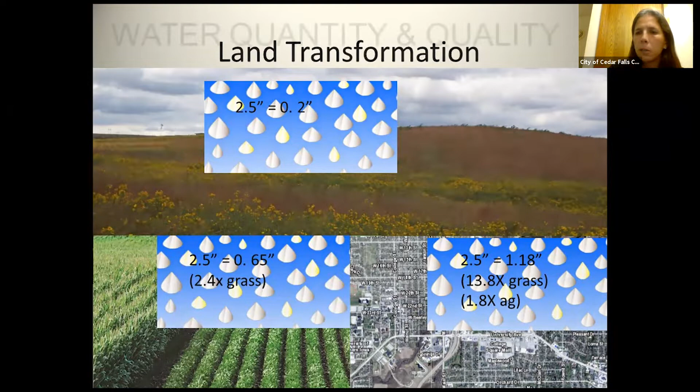So sometimes people think, well, what's the deal? I'm just going from crops that are already bad to urban. But it is a big difference when we go from agriculture to urban. So what's the issue with more water or more runoff?

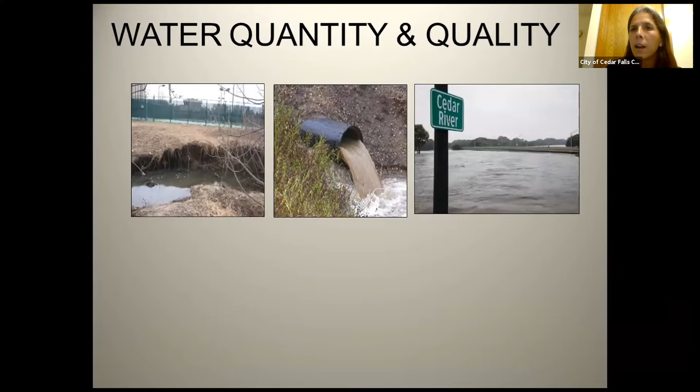Well, one thing is it causes erosion in our streams. Our streams have not evolved to handle this fast runoff, and with that it brings a lot of sediment that has consequences, for instance, for nesting sites of fish and fish populations. Of course, more water, more runoff, less infiltration generates flooding.

Again, erosion issues, but not only problems for the streams, but for our infrastructure. We have to update it, and you'll see in my presentation how much money we spend updating this infrastructure.

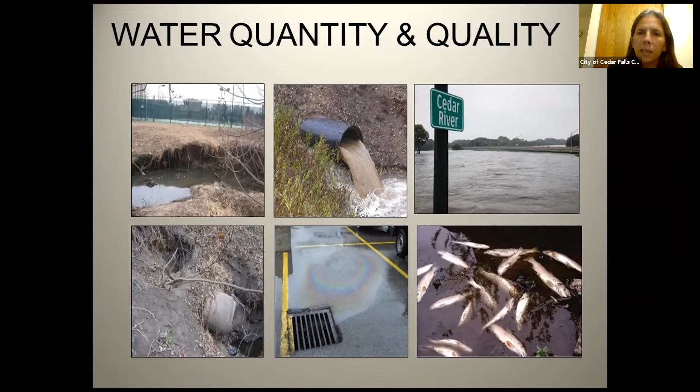And anything that gets into the parking lots, onto the floor, on rooftops, in any place, gets into the water, making it a water quality issue that can result in things like fish kills. So water quality and water quantity are both affected by this change in runoff.

Because of issues like this, the Cedar Falls Stormwater Program was created. I highlighted this from the website — I apologize for all the text — but I want you to know all of this is an ordinance. You can find it on the website, but I wanted to highlight what we do, and why are we here.

What's our goal? The main thing the Cedar Falls Stormwater Program needs to do is address the mandates that the federal government gives us through the Clean Water Act. So we're required to have this program.

And with the program, we try to do a few things. One, manage and reduce the potential for runoff pollution. We want to control pollution, and I briefly explained some of the issues. But we also want to concentrate on promoting health, safety, and general welfare of people and property.

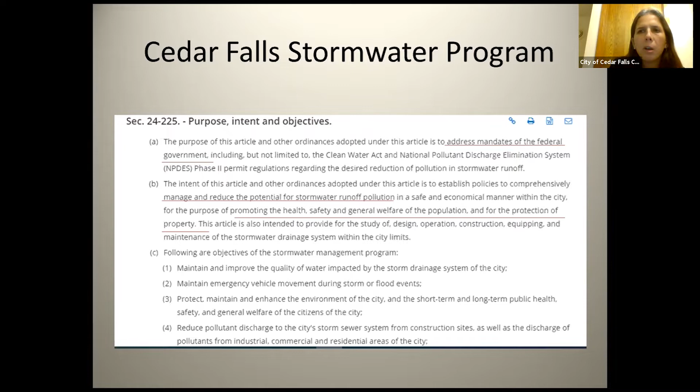This is also related to flooding, for instance. So those are some of the goals — there are many goals — and if you're interested, I'd advise you to go to the Stormwater Management Program on the website and see what the city is supposed to be doing with this, and why we're spending money on what we do. Those are the reasons why.

So I am the stormwater specialist for the program. I deal mostly with the construction and education parts of the program, but there's much more that goes into it. The person who deals more with the management of the program and design decisions of what we're going to do is the city engineer, David Wicke.

So if you have questions about things that I don't have control over, David is the person to contact. And then Chase Schrage is the Director of Public Works, who oversees David.

So this is about who deals with the stormwater program and who makes the decisions on where the money goes. I often get the question, what happens to my $3.50 that I pay every month for stormwater? Right now a household pays $3.48. In July it's going to go to $3.65, and that's as high as it's going to get unless we pass a different ordinance.

So what happens to this? We get it together, and this year it's budgeted that we're going to get about $950,000 with that. But we also have other ways to get income for the stormwater fund, like permits. When people are going to build, they need to get a permit and pay for that, which generates about $25,000, or about 2.5% of the budget, plus interest that we get. But most of what we do comes from the money that we all pay.

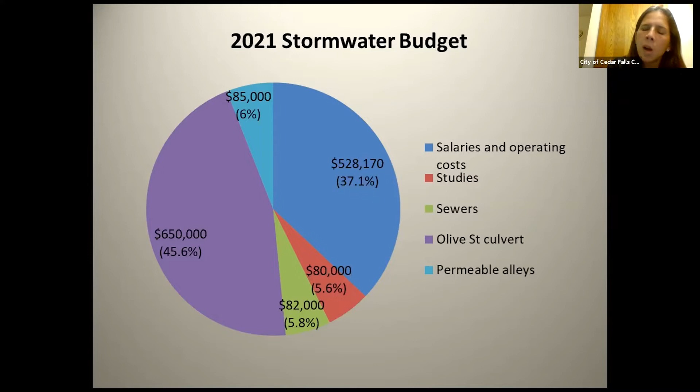So I want you to see that's what we have budgeted, but what gets in the budget is not what gets done. So I ask, what have we spent in the last years? But before I go there, this is the biggest expense that we have, the Olive Street culvert. There was public participation open for this, it's already closed, but since it's the biggest project, I wanted to share it with you.

On College Street we have this plaza called Pettersen Plaza, and here is the Dry Run Creek. Can you see my cursor when I move it? Perfect. So the Dry Run Creek is here, and what happens is there's a lot of erosion in this small area. So the project proposes to extend this plaza, pave over it, and put the stream into a cover, a big pipe, and expand this area.

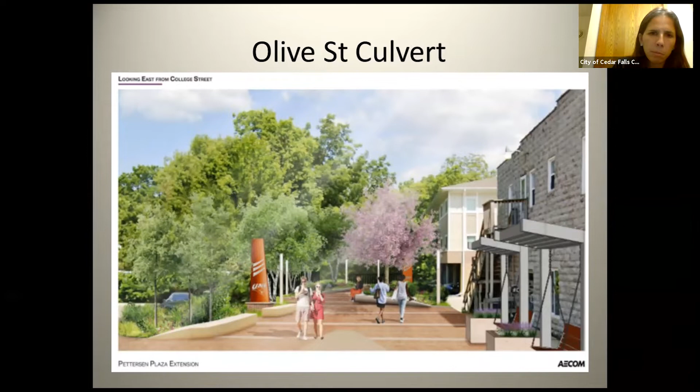So it would look more like, I don't know, just an area for people to walk over the creek. That's the bigger project that we have, so I wanted to show you that. But again, that's what is budgeted — we don't know if it's going to happen or not.

So I asked what we have spent in the last couple of years. In fiscal years '20 and '21, this is actually what has been spent. The most money, the biggest project, was for the Walnut Street box culvert. Culvert replacement — when there's a lot of water, we need bigger infrastructure, and it creates erosion and issues, so that's where our money has to go to replace this, and it's expensive. Hopefully we can find ways to reduce that would cost us less.

The other big expense was for the Clay Street drainage. They had to replace a lot of the pipes because they were really old. They also added two good biofiltration areas, a huge one and a small one, in a permeable alley, so that's another big part. The other big part that we already spent on was permeable alleys — the city is doing about three a year. So those are the bigger expenses.

So, for instance, in the Walnut Street box culvert, this is the picture from one year ago, before the project.

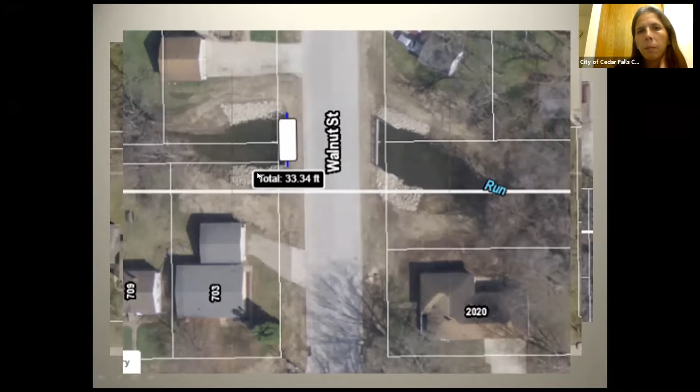I was trying to see what was the change. What you can see here, the measurement of the width is about 24.5 feet, and when it changes, it's about 33.3 feet. So they make them much bigger, and you can see all this erosion control in the banks. And that's an expensive project because of this. So that's what has happened.

This is the second project that we spent about $300,000 on. Part of the money came from a state grant, but also part came from the fund. So here's the permeable alley that was placed there, similar to permeable alleys you might have seen in other places. And here is the bioretention area, which is like a huge rain garden. Josh will talk about rain gardens, and this would be just like a big rain garden. So that's what the city has done.

But what can you do? What can regular citizens do? This sounds fun, seems fun to go to an outdoors festival. Someday we will do it again. But this doesn't seem so fun, just sandbagging, and you maybe remember that. And that's why we think, oh, we go and help when we need to, but what about helping before that, hopefully?

I think really the main thing anyone can do to help is contact elected officials. Any big project will take input from citizens, so try to be aware of these things. It's hard sometimes, but that's important. Just contact any of the elected officials and say, hey, I'd like to see more of these, or can you explain to me why this happens? I think that's really where the city takes direction from all of us.

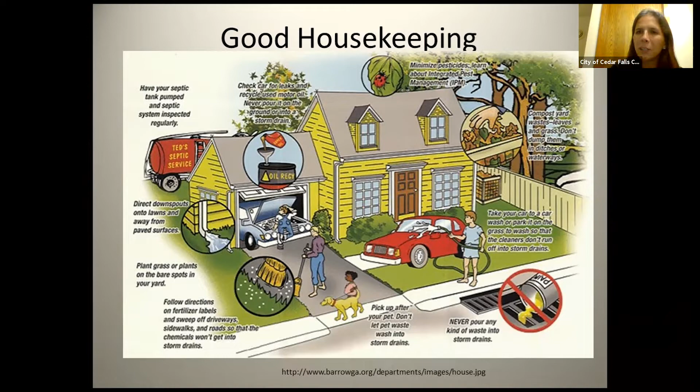So those are things you can do with water quality. One that helps me a lot is call me. If you see anybody putting anything in the creek or in the sewer, it goes to the creek — that's called an illicit discharge. Only rainwater can go to the street. Even sometimes you might see a pipe with clean water that might come from a pool, but you cannot put any pool water because of the chlorine level.

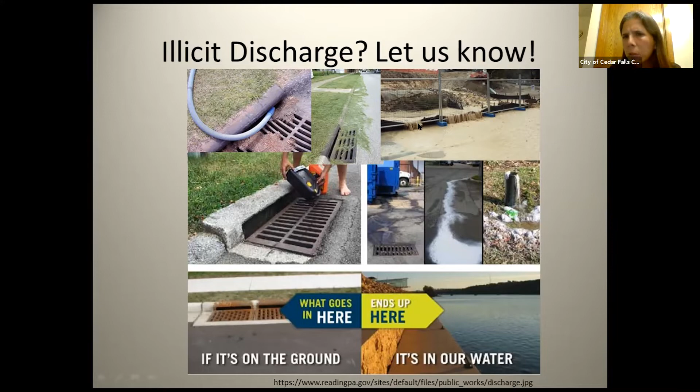So just let us know. Or construction sites that don't have good controls, just call us. You're the eyes for everybody, so let us know. Now if you're more worried about water quantity, a lot of citizens call me because their yard is flooded often.

So what can you do? We're gonna talk about that in a minute. Not only is the local area important in your home, but remember that causes erosion and flood downstream. The issue is that everything is connected — that's why we're getting so much water at once, because all these rooftops and streets and everything goes fast to the stream. So what we need to do is disconnect this. How can we disconnect all these impermeable surfaces and send water slower to the river?

One way is with rain barrels. There are many ways, but one is with rain barrels, and I'll talk about it. The other would be with rain gardens, and Josh will talk about it. So installing rain barrels is an easy way to help.

I have to say, I don't have one — I have one that I haven't installed after preparing for this presentation. I want you all to come by my house and see my rain barrel working in May. Pretty easy — you can make like a stand. You just need to make it tall enough to fit a bucket underneath. So that's what you want to make sure happens.

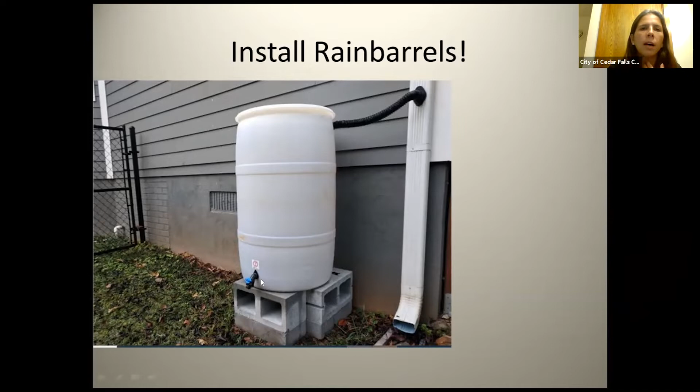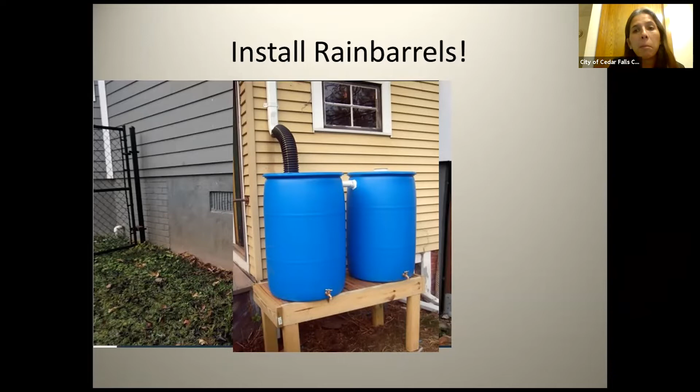You can install one or two. A lot of people just put them together and install two, because you'll see that one rain barrel fills really quickly. But some people go all crazy and install many, and in areas of the country where it's dry, you can really benefit from this economically. So it depends. Cedar Rapids has these cisterns in the library that are huge, so the size depends on what you can do.

You can be part of this by talking to elected officials. Just give them ideas, let's do things like this. It's cool, and it helps all of us.

So what are some benefits or considerations to have? The main thing is free water. I wish I could tell you that you'd save a lot of money because water is expensive, but we know water is cheap. However, you're saving some in free water. Now, I look for plant growth, and it does seem that the pH is better for plant growth, and also some of the elements are better for plant growth, so that's beneficial.

But there's also some concerns about what could be in your roof for plant growth, so I looked it up: should you do a water test? The answer I have for you is not to worry. When different people have done water tests, they've found there's really no worries, no need to do it, no concerns.

The main advantage of a rain barrel is that it's the cheapest and easiest option to help reduce runoff. Even if you don't have a rain garden or anything to put the water into, just waiting until after the rainfall has passed and releasing the water little by little can help a lot.

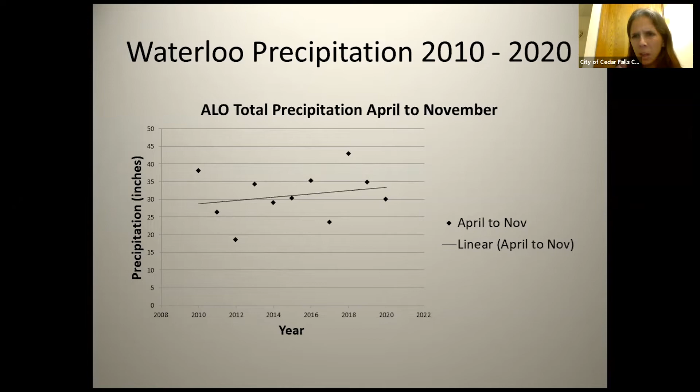I looked at the Waterloo precipitation for 10 years and tried to see how much it rains from April to November, which is when there's water, not ice or snow, or at least that's what I took. It varies depending on the year, but 50% of the time, the median value is 30 inches a year between April and November.

It also varies depending on the month. This is for 10 years that I looked up, and I looked at the median for each month. You can see that the wettest month is June, but most of the months are around 3 inches or below per month.

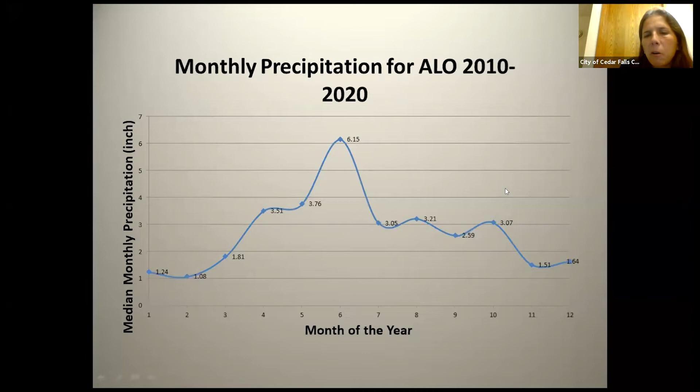So I said, okay, let's look at June and July, and I looked at 5 or 6 years for this, trying to see how many times, if I want 50% of the rainfalls for June, I'd need to collect at least 0.5 inches. For July, which is more typical, it's 0.46. So I said let's go with July. If you get your roof area and multiply that by the rainfall, and do a little conversion, you get how much you're going to collect.

So let me explain this really quick. And if you have paper and pen, I'll tell you in a minute what to do. So I said, okay, a typical home, let's say it's a 1,000 square feet roof. And you have 4 different downspouts. So let's divide that in 4, it's 250 square feet. I got like 50% rainfall of 0.46 inches, and I did the conversion.

To get 50% of the rainfalls in a roof of 250 square feet, you need 72 gallons. So rain barrels are usually 50 to 55 gallons, so you would need 1 or 2 depending on that. So you don't have to remember all of that. The only thing you're gonna do is think of the rainfall that you wanna capture. Again, it could be any of these.

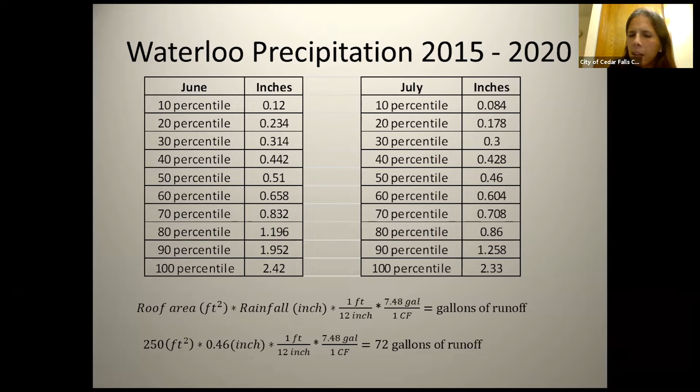If you wanna capture most of them, 90%, do it at 1.2. Or if you want to just capture, I don't know, 30% to 0.3, it's up to you, but this is just a guide, and I'll put this for you. I'll have this available for you to see.

Now, where do you get them and what are the prices? Any place. The truth is few stores carry them in the stores. So most of the stores you have to order them and they send them to you, and most of the shipping was free. So I looked at Walmart and prices went from $80 to $170 or more. There's some really crazy rain barrels.

Home Depot, same thing, 87 to 120 in those ones. Menards, same thing, 80 some, 100 some. Menards and Home Depot also carry these rain barrel converter kits that are only $30.

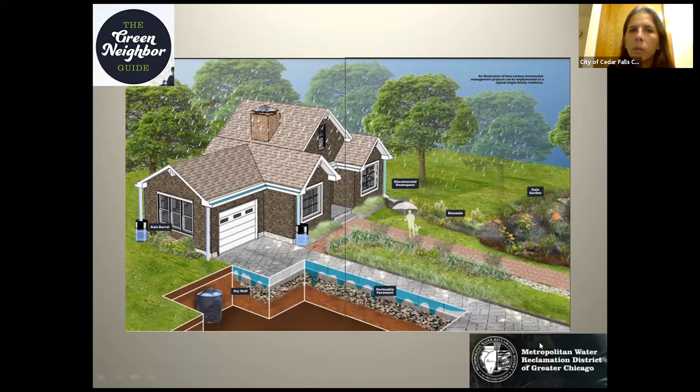Now, one resource that I really liked when I was looking at things was this Green Neighbor Guide by the Metropolitan Water Reclamation District of Greater Chicago. So I recommend that resource, and they have a whole book on all these things, and it was pretty well explained. And one of the things that they include is rain garden. So that's where Josh is gonna go in a minute.

But before that, I just wanna give you a minute. If you have any questions, you can type them in the chat and then we can go there. While you think about the questions, I'm gonna put my screen on this, so you maybe have time to write it down if you need to. So Felix, you tell me if we see any questions. So far we have some shy people, so let's see. Don't worry, if you want, we can also do questions at the end when Josh goes.

Josh, okay, so that's perfect. Some rain barrels at Menards in Cedar Falls and Waterloo. Do you have a rain barrel that you recommend? I really don't. Josh, do you have any that you recommend more than other brands?

I would say there's so many different styles out there, so get one that you like. I mean, if it's going to be off your back garage or back shed where no one's going to see it, you probably don't need a fancy one. But if you're putting one in your front yard right by your door, you might pay a little extra to get a fancier one. So it's really personal choice.

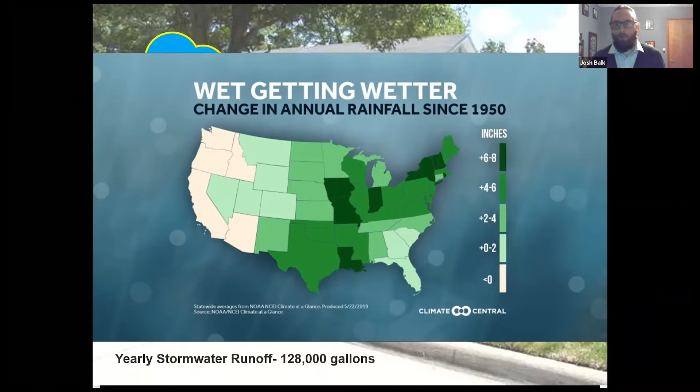So altogether, just a 1 inch rainstorm on an average home can shed off about 4,000 gallons to our storm drain system. So if you think in the Cedar Valley area, that's close to 130,000 gallons of water just from your home. When you think about all the homes in our community, that really adds up to a lot of water. And then the other thing is we're seeing climate drift and changing weather patterns here in the area. We've had wetter years recently, and in Iowa specifically, we've seen an increase in the average amount of rainfall anywhere from 6 to 8 inches. And there's projections that could increase. So the amount of water we're receiving in our area is being affected by that.

And that's when I get calls from homeowners who did not buy waterfront property, but are dealing with that in their backyard. There's a lot of water and not a lot of places to go. So that's when we come up with these wonderful solutions with things like rain gardens. And like I said, this is trying to harken back to the native Iowa hydrology and how water used to have a chance to get into the ground, to infiltrate, to slow the system down. So a lot of what Maria was talking about is really what our goal is with rain gardens here.

And so rain gardens themselves, it's nothing complicated. It's really just trying to design a beneficial landscape feature. These are strategically placed in the yards. It's not just the bottom spot in your yard where all the water goes to. There's some considerations we'll go into more detail on, but really we're just trying to capture an amount of that stormwater coming off from the roof or the driveway or the sidewalk or the road, direct it to these rain gardens, give it a chance to temporarily pond there, usually less than 24 hours. So that way that water can work its way into the ground.

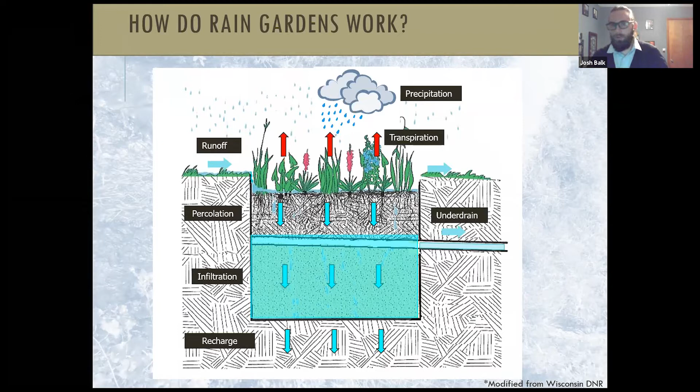And sometimes we have enhanced rain gardens designed. So we might include under drains or overflow options for those really heavy rainfall events. But then we have our wonderful native prairie plants in there that also help absorb the water, take it up, transpire it. So this is a much more functional system, like I said, akin to our native prairie Iowa heritage.

Well, just last week, it was formally announced that we have the updated guide that just came out. So you can go ahead and download it for free. I think for a short period, it's available to download also free through Amazon Kindle. So you can get all the information you need if you go to iowastormwater.org and go to the rainscaping and the rain garden, and you'll have the link to that. But like I said, it includes all the details I'm going to discuss this evening and goes into more details.

So some of the considerations with rain gardens, just like retail, property and all that stuff, it's all about the location. We want to have these rain gardens included in an area that's going to try and help the water quality. We don't want it, like I said, at the bottom of your yard. We don't want it in the wettest spot of your yard. We need to avoid utilities and trees and all that stuff. We also want to make sure it's not going to cause issues draining back to your house when it overflows. So there are some considerations with the location.

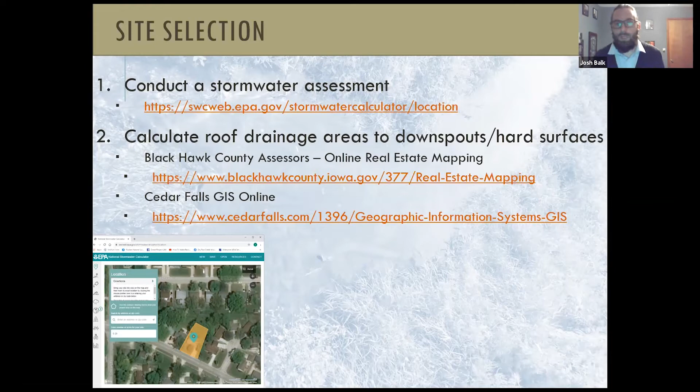So that's a really cool feature. If you just do a search for EPA stormwater home assessment, or follow that link there, that'll get you all set up.

Another thing to consider is that we're trying to treat runoff from these hard surfaces, so calculating that is not always easy. If you want to be out there with a yardstick or a tape measure, you can go right ahead.

Otherwise, there are some useful resources online here in the Cedar Valley. If you're a Cedar Falls resident, you can go to Cedar Falls GIS Online. This is a free service they provide where you can zoom into your home property and designate how much hard surface you have there. They have useful measurement tools that do a really great job with those rough calculations.

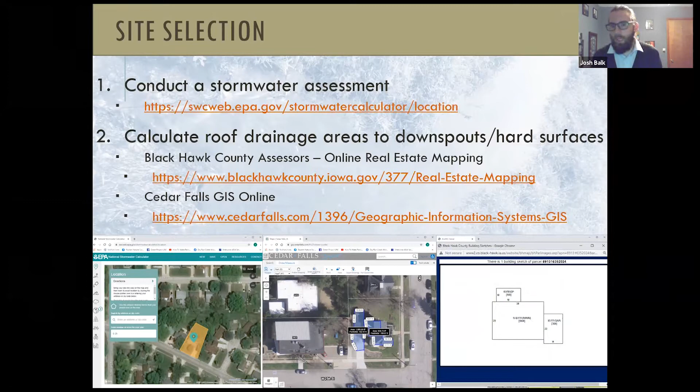If you don't live in Cedar Falls but you're within Black Hawk County, you can use the Black Hawk County Assessor's website. Type in your personal address and it'll come up with a detailed plan for your home, designating the approximate measurements. That'll help you figure out the amount of roof area draining to each downspout.

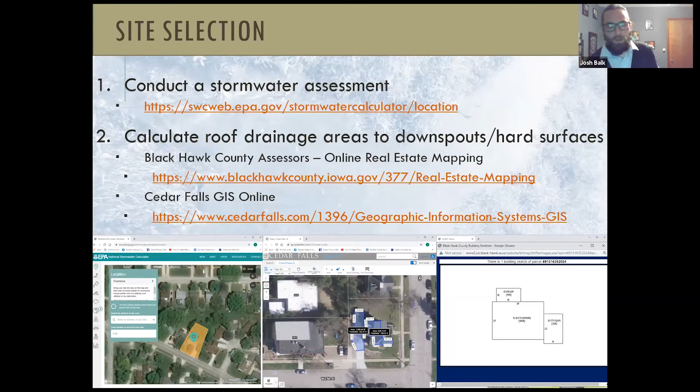Another good idea to help figure out how much area you have draining: go out during a rainstorm event, bust out your umbrella, and see how the water flows on your property. Do you have a hill or slope where it's coming from your neighbor's house? Is your water running off down to your neighbor's? Just see where this water is going.

Especially if you have a nice sketch pad with those grid squares, that can really help you designate out all the trees, the buildings, and all that stuff, and help you get a better idea of where might be a good place to put in a rain garden.

Another important thing is to have your utilities marked, so that way you aren't digging near your internet line or anything like that. You don't want to lose power for an evening either - that's no fun.

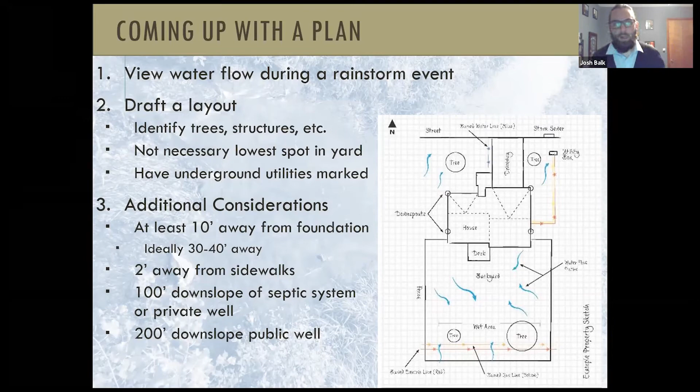Because we're encouraging water to get into the ground, you don't want it right next to your house. Have it at least 10 feet away from your foundation, but ideally 30 or 40 feet away from buildings. You also want it away from your sidewalk, from septic systems, and from private wells. Those are just some considerations on siting your rain garden.

The next step is to figure out your soils. There are some useful tools online - you don't even have to bust out a shovel. You can just use your mouse and do some research.

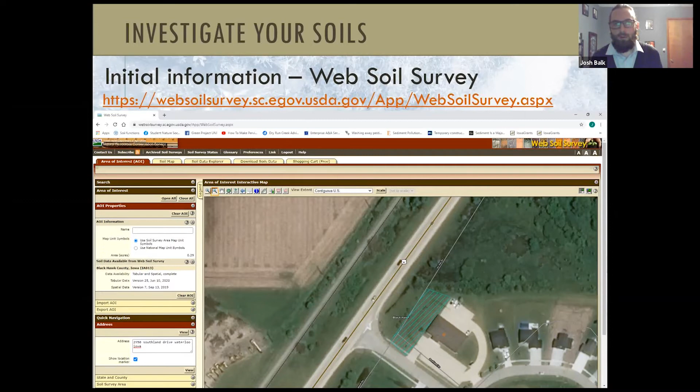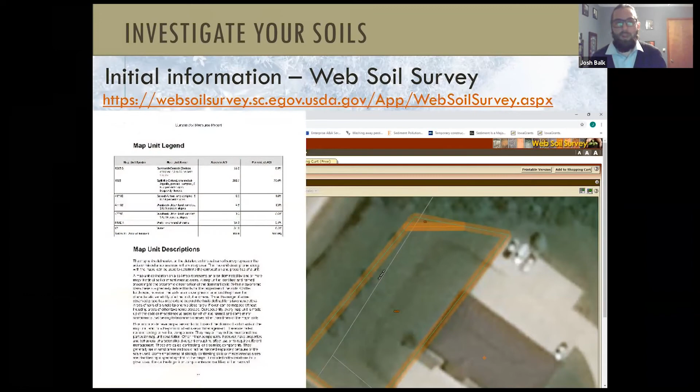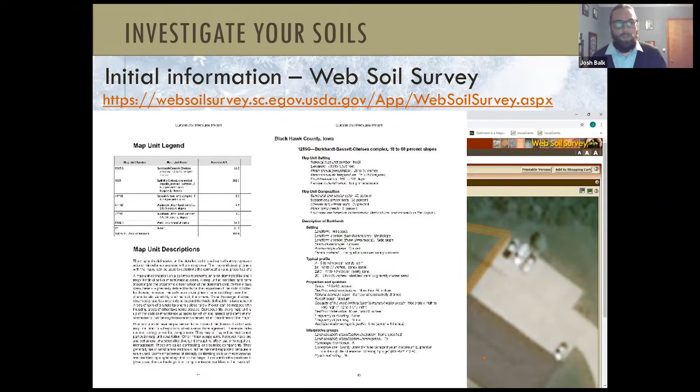If you do a Google search for Web Soil Survey, you'll get linked to this service provided by the U.S. Department of Agriculture. Type in the address of your home, designate your property area, and it'll tell you the soil types designated for your area. You can then run a soils report, and it'll give you detailed information about each soil type within your property - its drainage, depth, and the estimated depth to groundwater. Very useful information, and it's a free service - just follow your mouse and let it do all the work.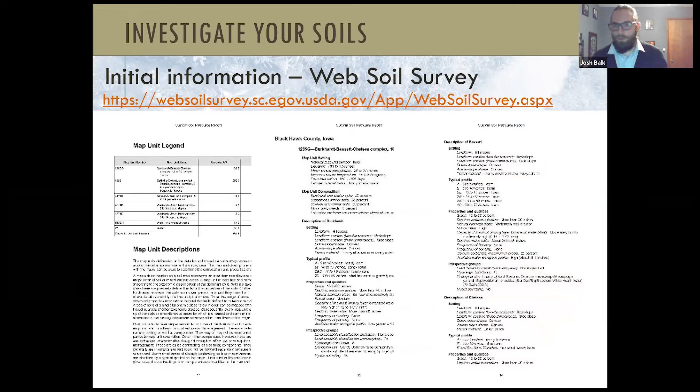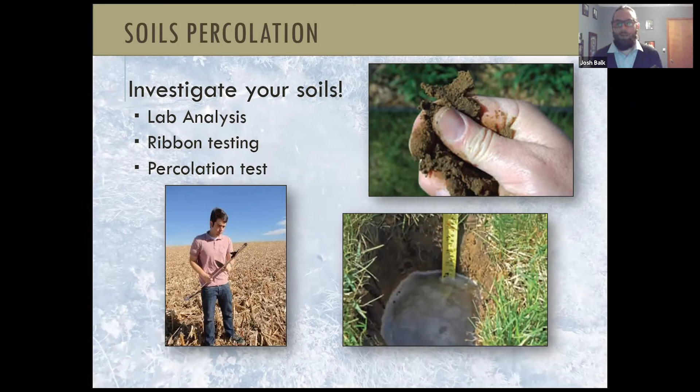But you can't just rely on those online tools. At some point you'll need to get out and get your hands dirty, but that's the fun part of rain gardens - getting your hands dirty and doing some work. There are a few different methods, and probably the best one for investigating your soils is a soil percolation test.

For this, I should definitely highlight it again: always before you dig, go ahead and call Iowa One Call. It's a free service.

They're out there marking your utility lines within 48 hours. So yep, I would say always do that first.

But for the soil percolation test, you pretty much just dig a hole in the ground. You can use a small shovel, you can use a post hole digger, or if you have an auger, you can go ahead and do that. You just want to try and go maybe 2 to 3 feet down, and that should give you a good idea of what you're looking at for soils.

If you notice lots of clay, if it's really tough to get in there, if there's lots of gravel or rocks, that can give you a good indication of what soil type you might be dealing with. Otherwise, if you see really black soil - we don't call it dirt, we call it soil - if you see nice black soil that looks healthy, that's usually a really good sign you have a good site for a rain garden.

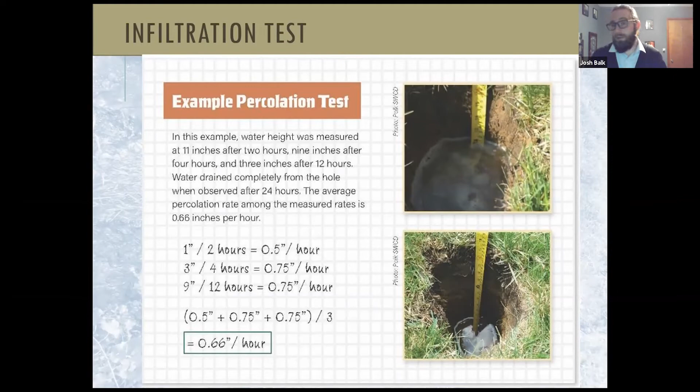So the simple test you'll do is over a couple-day period, you'll go ahead and fill your hole with 12 inches of water and just see how quickly that water goes down through the hole. You'll kind of just do some notes and calculations. It's not like you have to set your lawn chair up and watch it the whole time. You can go out and check every few hours and just see how quickly that water is going down, because that's going to tell you how quickly the water is going to go down in your rain garden.

Once you know that, it can help tell you what you might be looking at for different types of rain gardens, how big it might need to be, if you need to oversize it, and stuff like that. So sizing your rain garden is an important thing - I think that's the most common question: how big does my rain garden need to be? And it depends, is always the answer. It depends on how big your roof is, how much is coming through the downspouts.

Based on your soil type, your soil percolation test can kind of tell you there's a little bit of wiggle room. So if you're kind of restricted on how much room you have for a rain garden, you can maybe dig it a little deeper and create more of a ponding depth. Otherwise, if you have a wide open area in your backyard you want to devote to a rain garden, you can go shallower and size it up that way. But that's where your percolation rates will help determine the percentage from your roof downspout that you'll need. So 10% of your roof drainage area is pretty average for what we size for a rain garden. If you have 500 square feet draining through one downspout, you'd be looking at a 50 square foot rain garden. That's pretty standard.

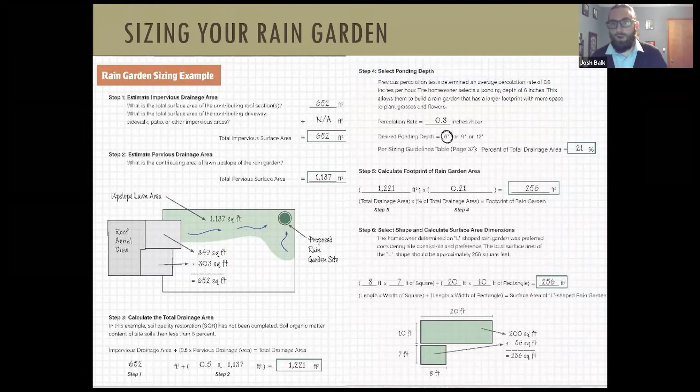But the new rain garden guide has this wonderful new calculator. You can actually go ahead and type in what you're finding for your roof - your roof drainage area, how much water is coming off from the yard - and you can just type these numbers in there, and then it will spit out the results for what you need for how big your rain garden would need to be. So like I said, it saves a lot of the guesswork, making sure you're doing things right when you can just type in what you're able to find there.

So I'll go ahead and highlight that - there's two different types of rain gardens. If you have really good high quality soils, good soil percolation tests, lots of good organic matter in there, you can just do a basic rain garden. This is one where we rely on the existing soils. We pretty much just dig out the bowl for the rain garden, maybe bring in a little bit of amended soils. Otherwise, we just rototill what's already there, add some mulch on it, throw our prairie plants in there, and then we're good to go.

If you're further along with your soils investigations and you maybe have more clays in there and it doesn't quite drain into the ground as good, we might need to get a little creative with it and do something called an enhanced rain garden. That involves a little bit more work - like I say, you're digging a little deeper, you're maybe bringing in more higher quality soils and amending the soils there.

We usually have to do some type of overflow structure - a perforated subdrain with a non-perforated outlet, directing that overflow water elsewhere. The goal with rain gardens is we only want water above ground for a short period of time. We want it to work its way into the ground, not stay there more than 24 hours, so we don't have issues with mosquitoes. These overflow structures help ensure that's the case.

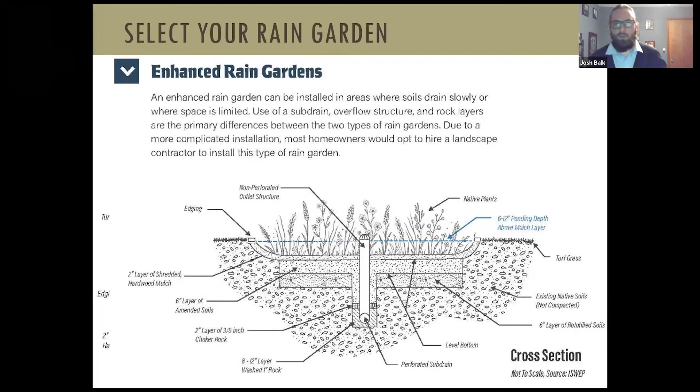I don't anticipate there are too many landscapers on the line, so don't worry if you've never landscaped your yard before. There are wonderful ideas and options out there for your rain garden. They come pre-labeled with all the plant species you can have, a nice diversity of plants, shapes and sizes. That's really the cool part of the rain garden - customizing it to fit your home where you want it and making it work for you.

You can use lots of natives, fewer natives, get shrubs in there - lots of different options, and all these ideas are included in the newly updated rain garden guide. Knowing what you're getting into with the rain garden is really important, and another new feature of the guide is a material list, to help you figure out how much topsoil, compost, mulch, and how many plants you're going to need. Those are probably the four most common aspects, and coming up with a budget to make sure you properly set enough funds aside is really important too.

There's lots of ways to wiggle around with this. You can choose plant plugs that are maybe only 3 inches tall, which can help save you money, or if you have more money to spend, you can buy larger gallon size plants. If you're concerned about mulch cost, the City of Cedar Falls and City of Waterloo have free mulch available that you can utilize in your rain gardens. So that's some of the ways you can cut cost corners. The new guide helps you figure out how much of each material you're going to need.

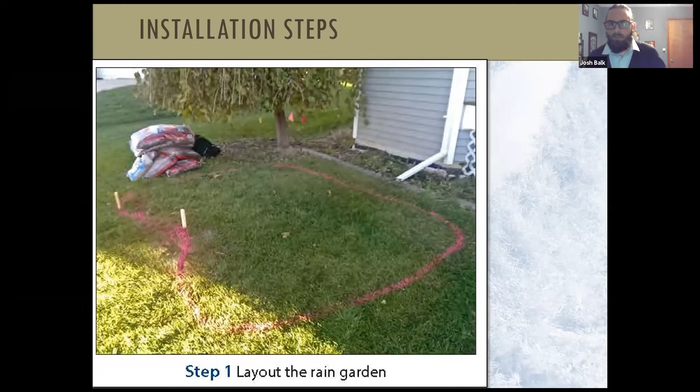So have your plan, have your materials, you're good to go - here comes the magic day, it's time to install the rain garden. It comes through with four easy steps. First, lay out the area for the rain garden, make sure you measure it. Having spray paint or markers is really good to help visualize and make sure you're happy with it. Then comes the wonderful work of busting out a shovel and getting your hands dirty, excavating the rain garden - usually going 12 inches is the average for most rain gardens.

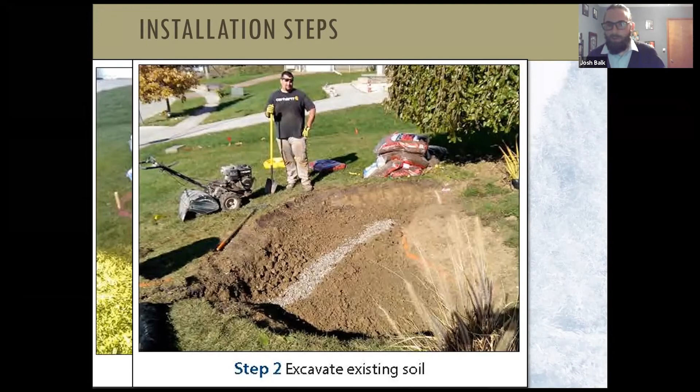If you have to do that enhanced rain garden, you might have to dig deeper. Once you have the rain garden all excavated, you come back adding those higher quality soils in there and rototill them together. Then you add the mulch and put the plants in, and you end up with a beautiful garden like this. If you have a couple people helping you, you can get a rain garden knocked out in a day, no problem - otherwise, set aside a full weekend to make sure you have enough time.

A few features of rain gardens are really important to make sure it's successful for you. Having the rain garden level is really important - each step of the way, when excavating and adding materials back in, making sure it's level ensures the whole rain garden is utilized and the water gets a chance to infiltrate. There aren't many places out there that have perfectly level yards.

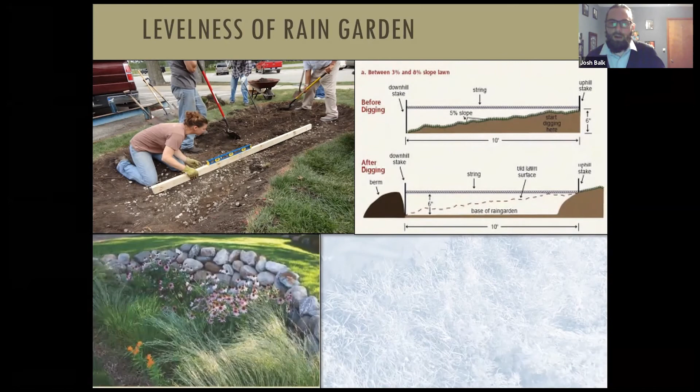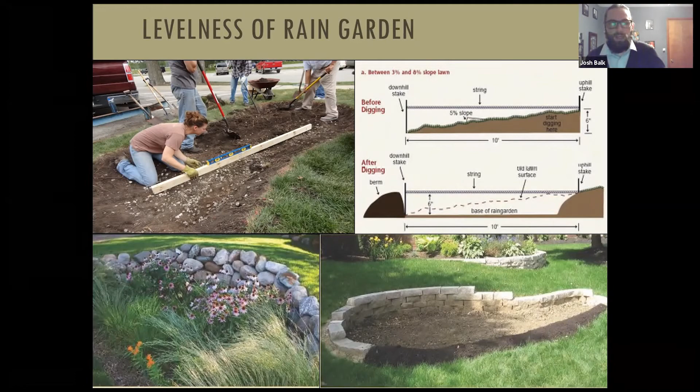So there are a few different options for making sure your rain garden is level. A lot of times we can use some of the excavated soils we dig out of the rain garden, creating a berm - that's a good way to utilize those features. Other times you can do retaining walls, whether something more artistic with rock or traditional block pavers, which can really help if you have significant slope. That just adds to the enhancement of the rain garden, making it more of an attractive feature.

You have a couple options for connecting your downspouts. A common one for folks who don't want water traveling above ground is to run buried tile lines. You can get these from your local hardware stores, usually in 3 or 4 inch tile diameters, and then you're good to go. It's a little bit more work with the digging, but then you can mow and put grass back over it just like normal, and still have your landscaped rain garden.

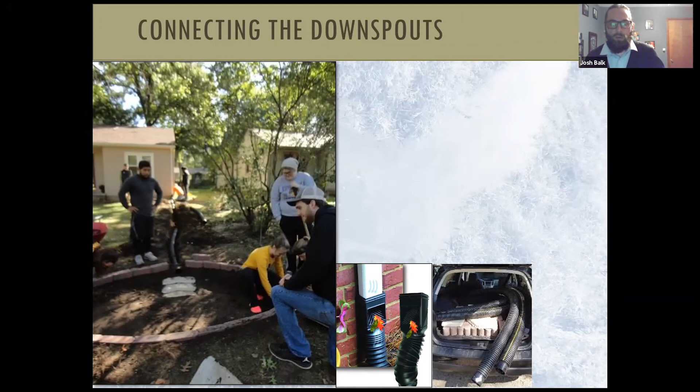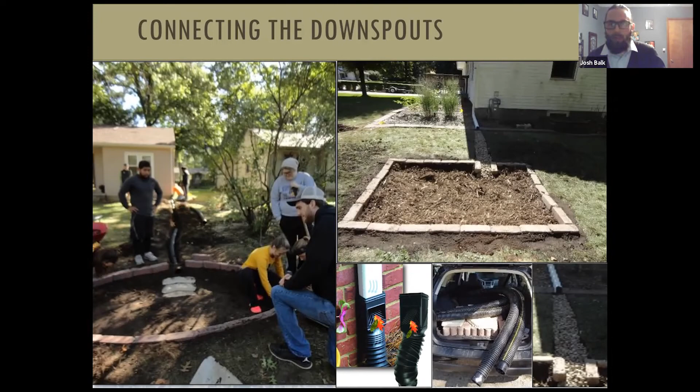Another option, if you do it closer to your home, is a little rock chute. You excavate a few inches down, fill it back up with rock to help slow the water down, and create a nice channel for that water to flow to the rain garden. Either one of these works, it's just personal preference.

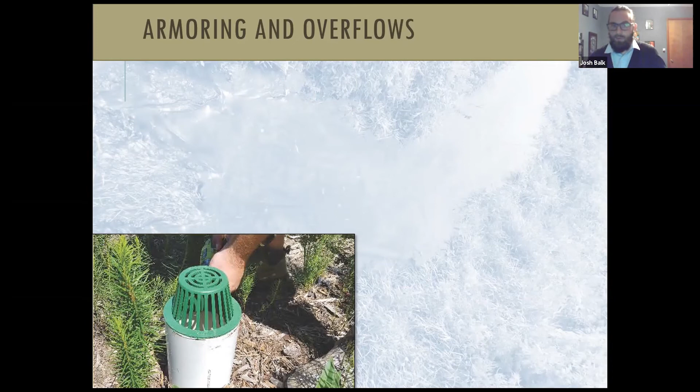Another important feature of rain gardens to consider is the overflow. If you have an enhanced rain garden, make sure you get that set up, so that's where the water goes if the rain garden fills up. Otherwise, if you don't have an enhanced rain garden, you can do another rock chute, so that if it fills up with too much water, it has a place to go. Directing the water to a certain area is important.

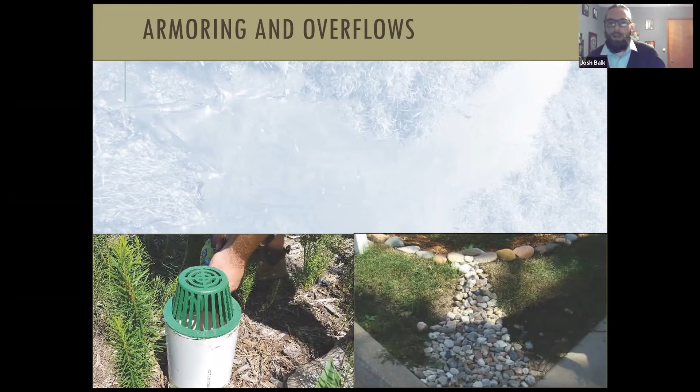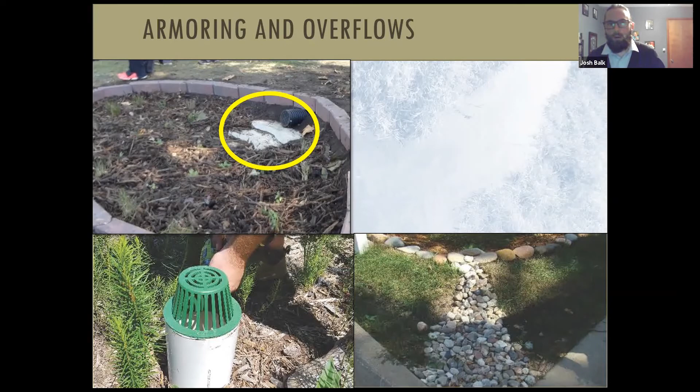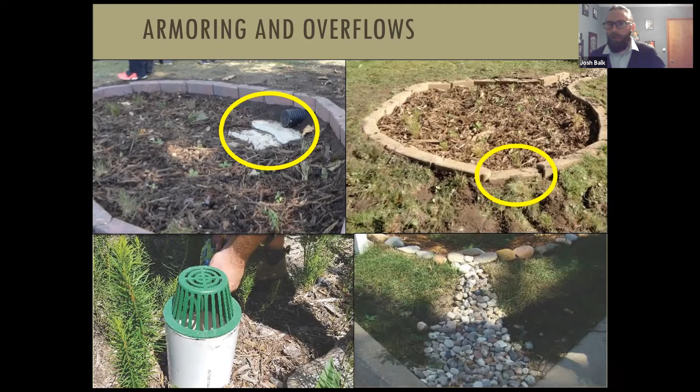Another thing, the inlets of the rain garden, is important. You don't want all your plants and mulch getting washed out, so sometimes armoring the inlet is important. You can put some rock there, use flagstones, whatever you want, and that's going to help dissipate the water so you don't get that washout. And make sure you designate where the overflow is, and have that clearly defined, which is going to help with water flow.

Another wonderful way to customize your rain garden is your prairie plants. You don't just have to use prairie plants, there are non-native plants that also work well in rain gardens. There are a few dozen plants we've identified that work well in the soil types of rain gardens. Some personal considerations you'll have to make are the amount of sunlight your plants will get - if you have a shaded backyard where you're putting your rain garden, you'll have to choose more shaded plants.

We always recommend doing a diverse plant layout for your rain garden, so that way there's something blooming year round. You're helping our local pollinators and making it more attractive. We also recommend including some grass species - having that diversity really helps ensure your rain garden functions better. You can check out the rain garden guide, see all these pretty pictures, and help figure out what plants you want for your rain garden.

The big question is, where do you get these plants? You can go to the local store, go to local nurseries, support those staff, and pick up some of your plants. But one thing we definitely recommend considering is that not all the plants at the big box stores are what they seem - it might say it's milkweed, but it's not necessarily Iowa milkweed, it might be the Pennsylvania strain or the Texan strain or somewhere else. So we always recommend folks try to look for Iowa certified, locally sourced native prairie plants. Those are adapted for our soils, our pollinators and insect species are adapted to them, and they're adapted to our climate here as well. That's where you're going to have the highest success for your plant species.